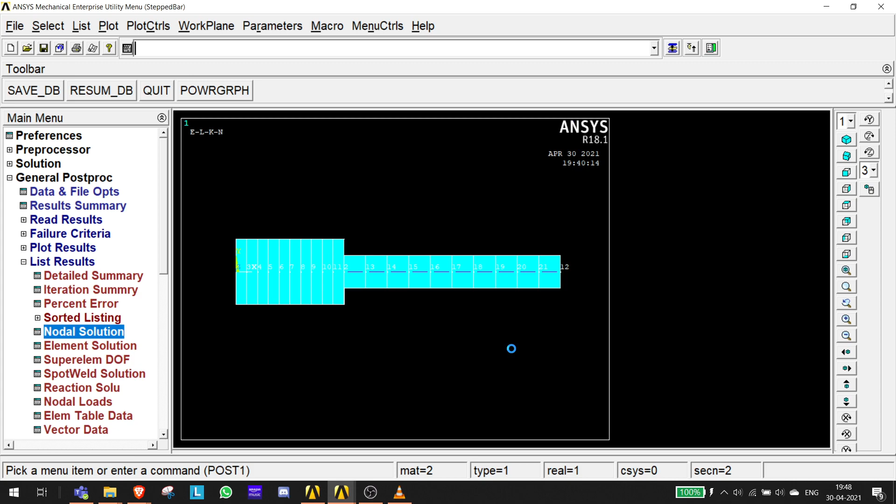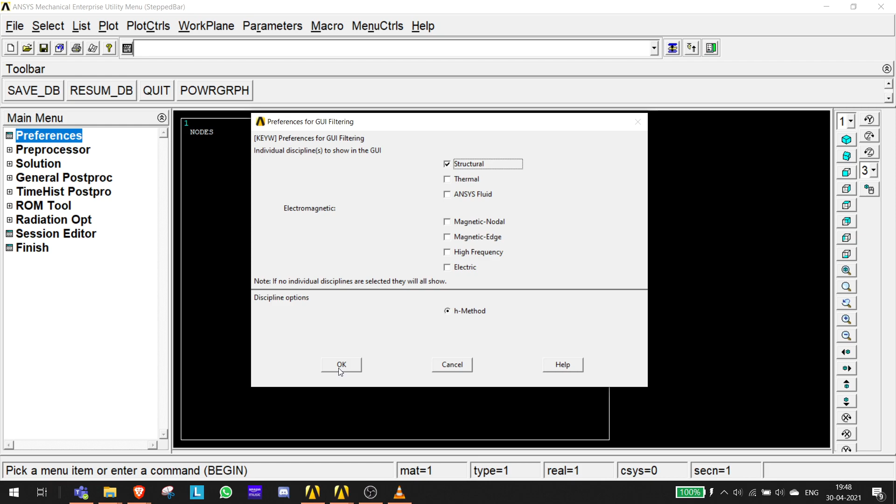And yeah, so this is a new file and now we have to analyze. This is our question, right? So अभी इसमें देखो लेफ्ट वाला जो एंड है दैट इज फिक्स्ड एंड इसका क्रॉस सेक्शन इज डाया 20 mm का सर्कल है, ठीक है। So I start, preferences will be structural because we are performing a structural analysis. Click OK, go to preprocessor, element type, add/delete, add.

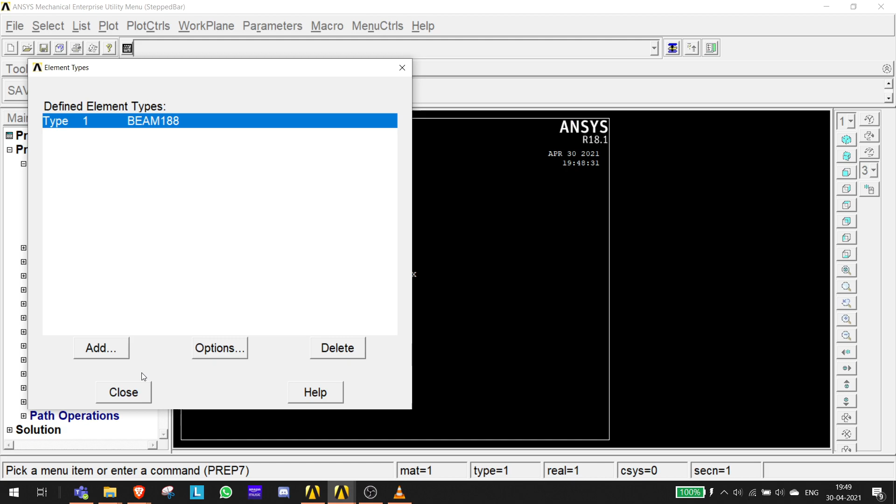Now this is again a beam element, जो last practice में किया था वैसे ही, this is again a beam element and it's two noded because then we apply elements and divide it into number of nodes. So इसलिए इसको two node ही रखते हैं हम लोग and click on OK. So see, only a single element is added and now I'll close this. Element is done. Now we have to give material properties, and so for that we go to material properties, material model, structural, linear, elastic, isotropic, right?

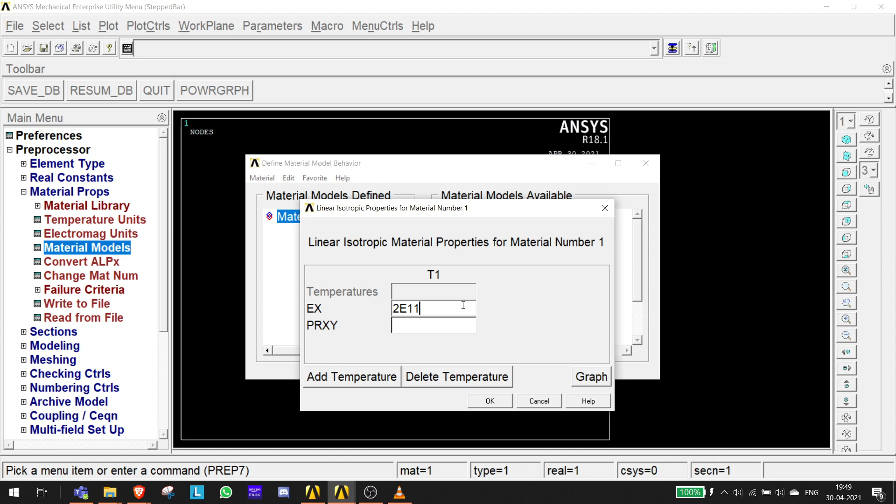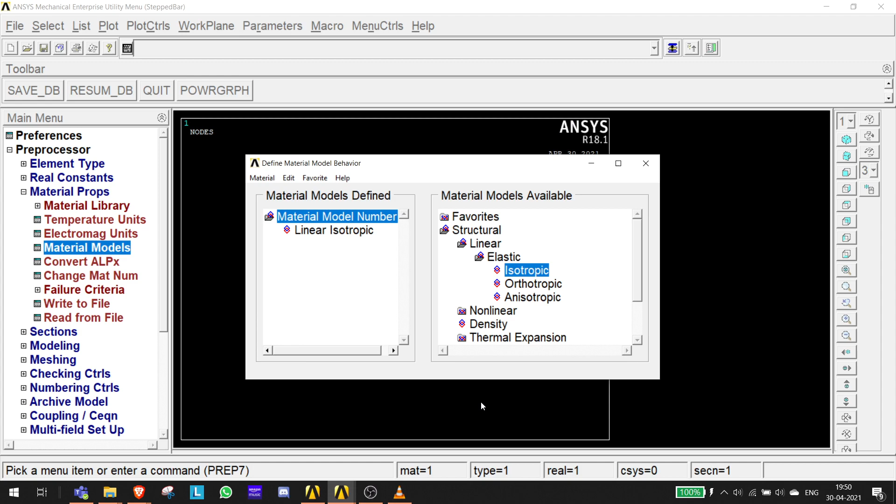Now what is EX? In the question it's 200 GPa and mu is 0.29. So as I told, ANSYS is dimensionless, so we have to give it as 2e11 because we have to decide the dimensions. So I am taking it as Newton per millimeter square. So converting 200 GPa to Newton per millimeter square, it gives out the value of 2e11. Okay, and the Poisson's ratio is 0.29. So I'll put it as 0.29. Now click on OK, and yeah, so the material is defined. Okay, so we have defined the materials now, right?

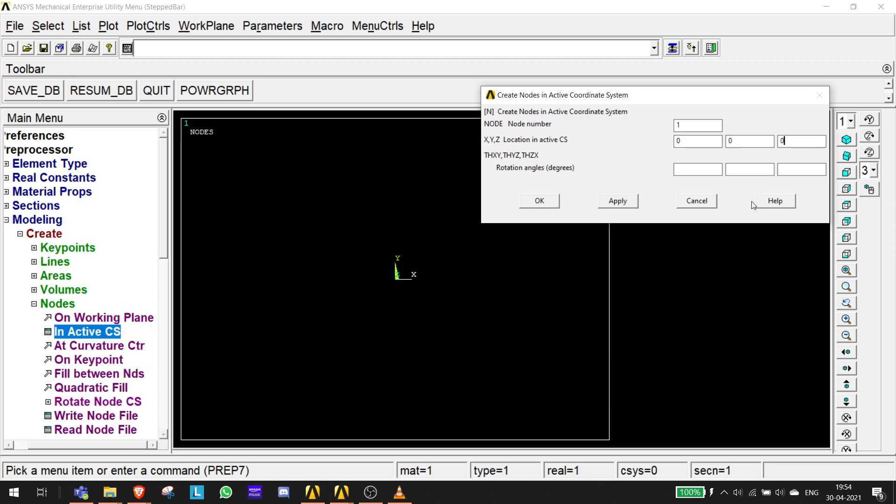It's 100 mm. So for 100 mm, go into modeling, you have to first create key points or you can even create nodes. So this time we'll be creating nodes in the active CS. So in active CS now it's asking for node number, right? So node number we can define as 1 and इसका location will be here, so it will be 0, 0, 0, right? ठीक है, हो गया. Click on OK and see, a white small dot has appeared and the node is created here.

Now in Active CS again, but we have to give node number as 2, and for node number 2 only the x direction

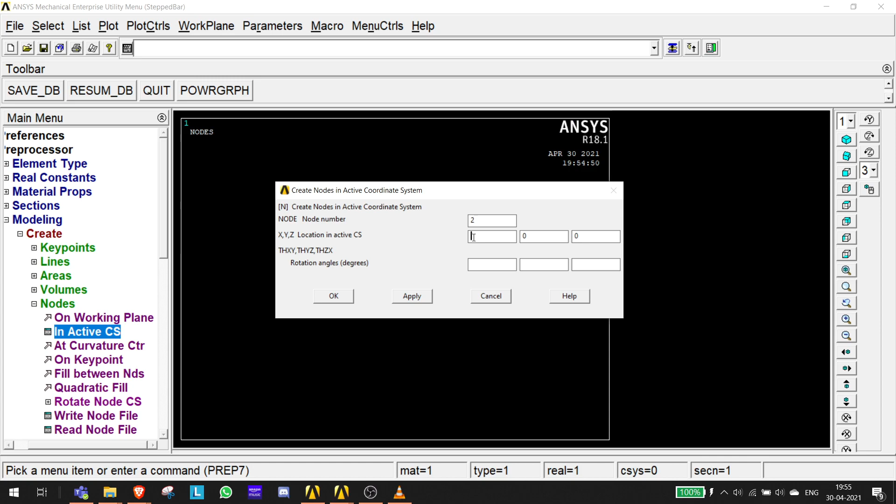So I do this as 100, and now I'll click on OK. So see, both the nodes are created.

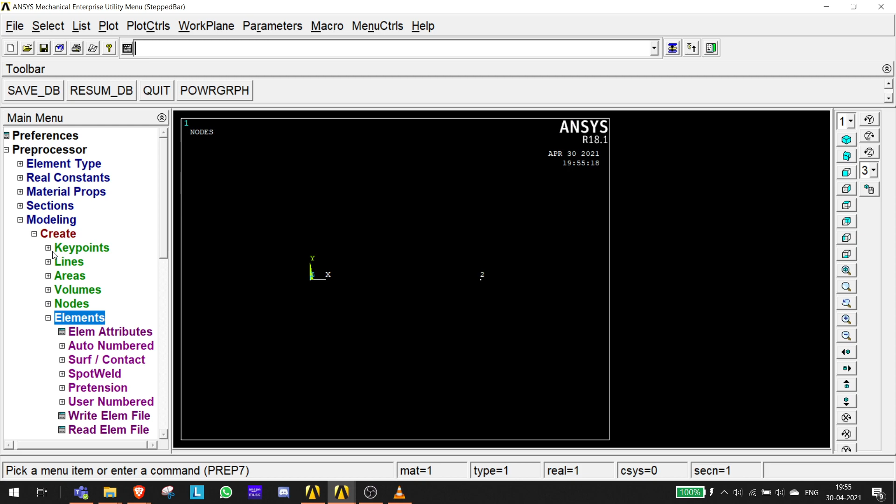Okay, just a second. So, fine. So here it's saying that these nodes which are created now cannot be used for lines. So for lines you have to always use key points. Okay, so what we will do is we will delete these nodes and we will do it with lines only. I'm sorry, but I'll select both of these and click on apply. So now these two are deleted.

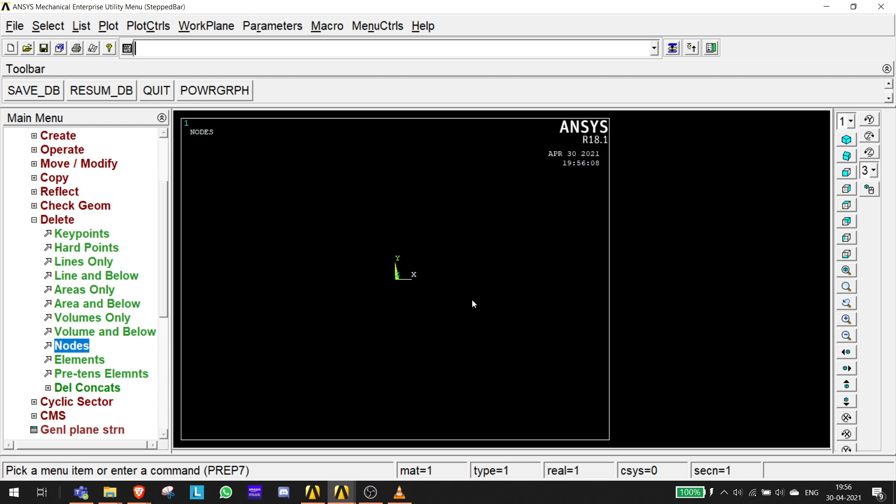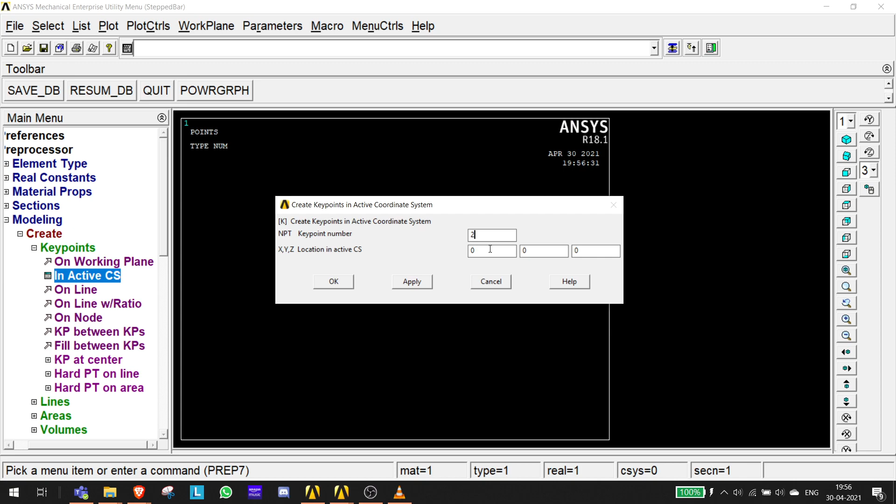So we'll go to preprocessor again, go to modeling, now create key points. As I said, in the last video we created key points. So in key points, go in Active CS and again we'll give key point number as 1 and it will be 0, 0, 0. Apply, and the second key point will be at 100. So 100 and OK. So see, both the key points are there now, and now we can create a line.

Okay. From nodes also we can create lines, but I'll tell you in the next video how to do that, because currently I don't remember it.

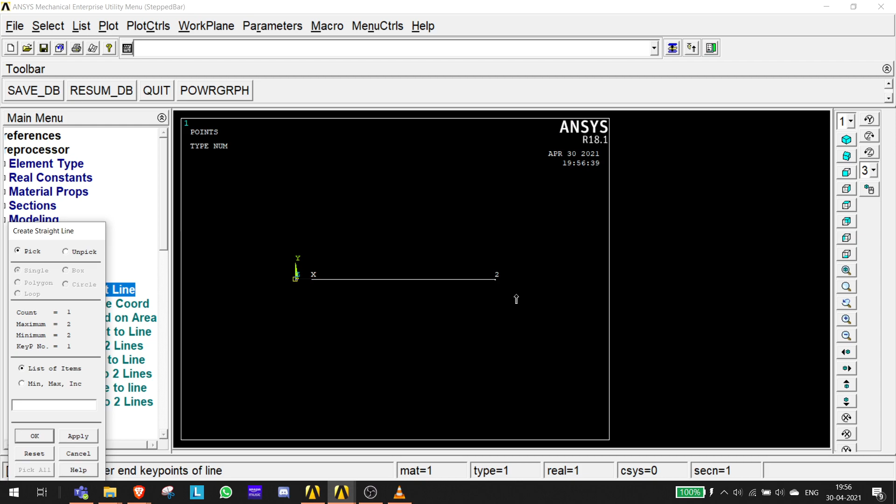So go into lines, go to straight line and pick these 2 points. See, your line is created. Click on apply. Yeah. So your line is done. Now what you have to do, the next step written here is meshing. So in meshing, go to mesh tool.

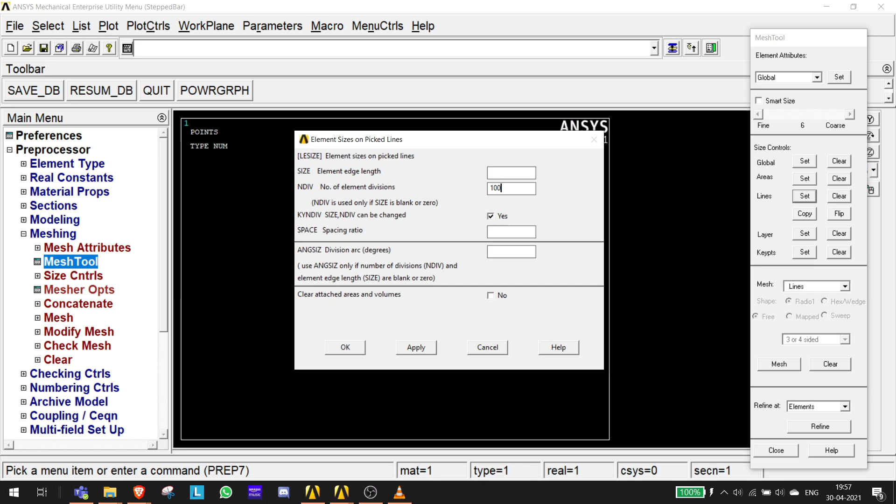So this time, lines, and click this line, click apply, and now I'll be dividing it into 100 elements. Okay, I'll click on apply. So see, now this, oh, it disappeared. So what to do? Go to plot, multiplots. See, now this is divided into 100 elements. Okay, so click OK. Now you cannot see the mesh tool tab. Go Alt+Tab and see, this comes, and now you have to mesh this line.

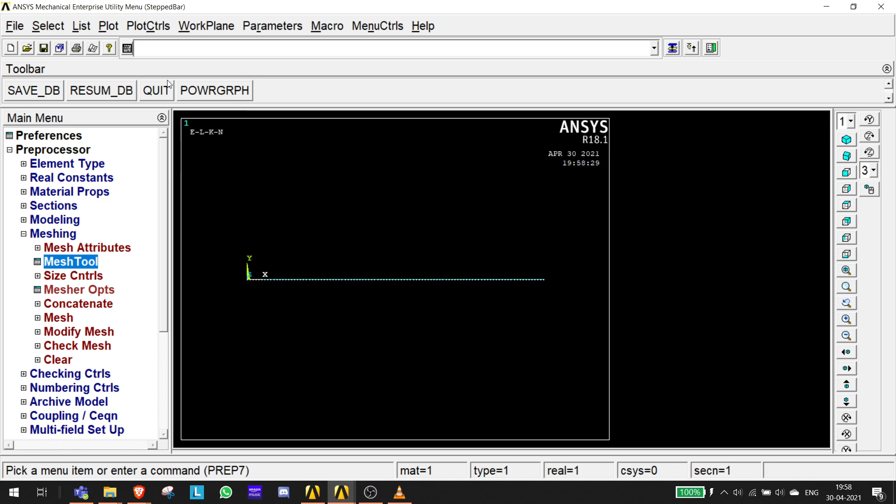So click on mesh and click on this. So this whole thing, and click on apply. So now this line is meshed. Click on OK, go to plot and click multiplot. So you can see these white dots appear showing that this line is meshed. Since this line is meshed, now you will be able to see the cross section. So go to style, size and shape, check if the cross section has appeared.

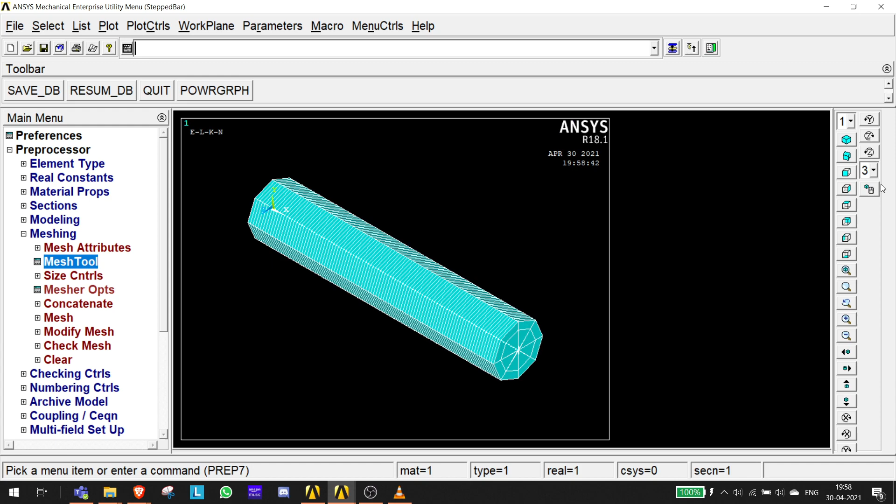Click on OK. So yeah, I'll just make it a nicer view. See, it's near circle because APDL works kind of that way. The cross section looks like this, but it is circular. Don't worry about that. So now I'll do the front view again and I'll turn this element off. Go to style, turn this off. Okay, so now the last step is defining the loads.

Define loads. Go to define loads and go to apply. Now where are you going to apply and what are you going to apply? These were two concerns. Okay, so firstly we will be applying structural load, structural displacement. Where? Displacement on key points. And which key point? The leftmost. So see, there is a trick.

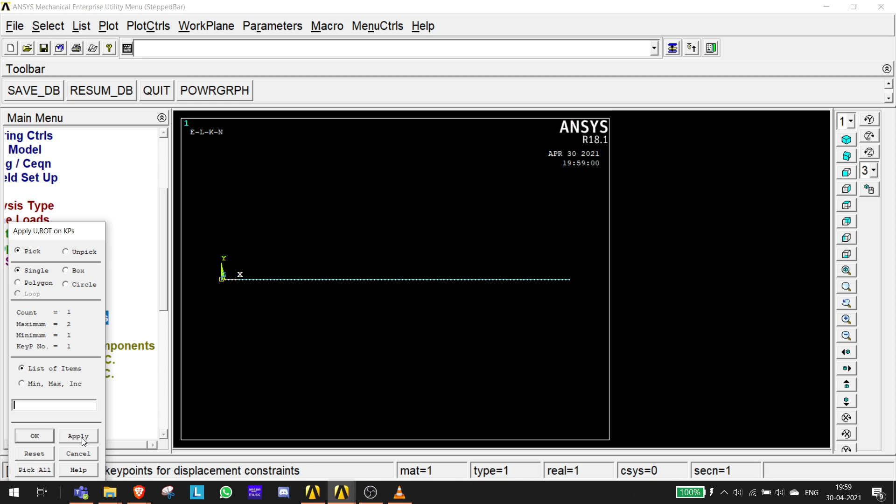If you are not sure whether the first key point or the second will be selected, go to the leftmost part and click. So it will always select the first key point. Okay, if it's there for first and last, you can apply this trick. Okay, now click on apply, and all degrees of freedom will be set to 0, and click apply.

Okay, so this side is completely constrained. Click on OK. Now you have to apply force. So go on force, click on key points. Now which key point? The last one. So click the right side, most rightward. So it will click the most rightward key points.

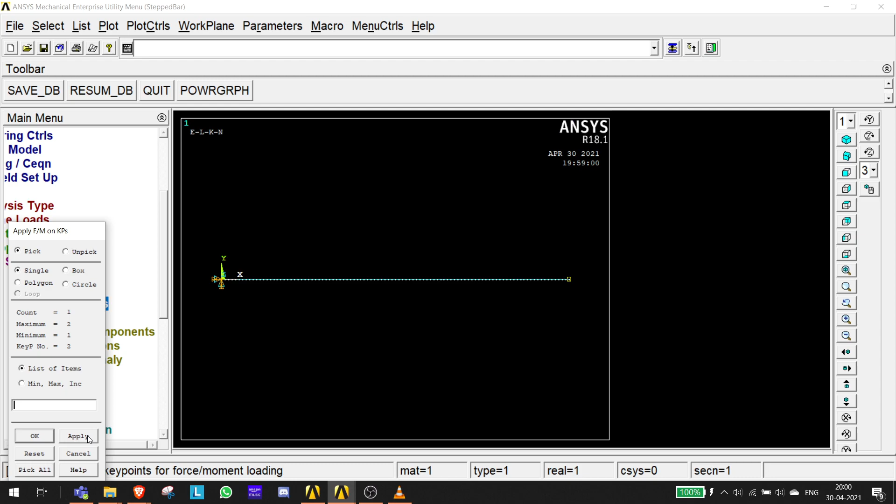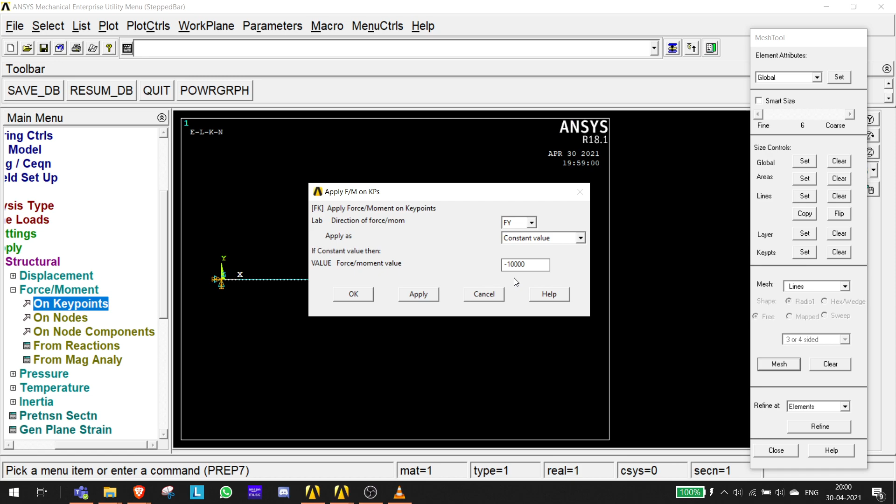Okay, so now click on apply, and now in this case it's not in X direction as the previous one, it's in Y direction. See, it's a vertical load. So for vertical load it will be Fy, and it will be not positive but negative 10,000. Now why 10,000? Because ANSYS is dimensionless, as you know, and you have to keep it like that. Okay, so now click on OK. So you can see the load has been applied.

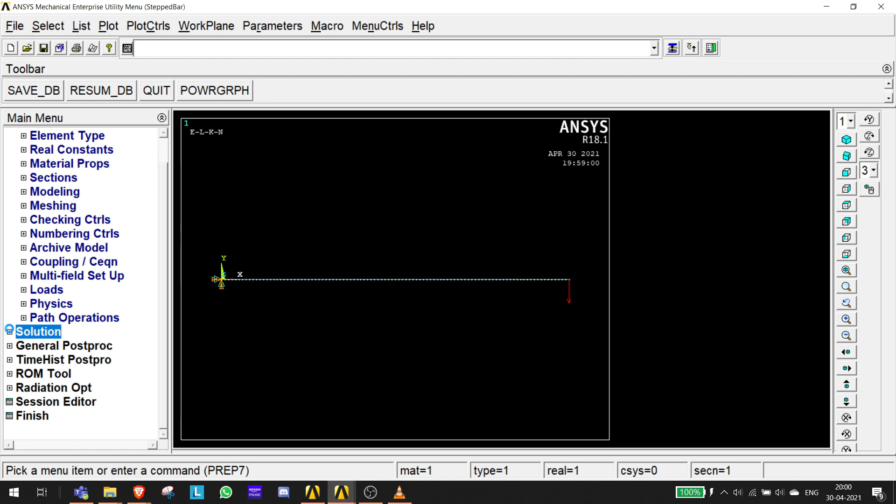Now this will be a screenshot again for the DJ Sanghvi students' practical exam. And now close the structural define loads. And now what you have to do is the solution. Okay, solution, go to solve current LS and click on OK. Yeah, so the solution is done. Great job. Now you have to check whether the solution is generated.

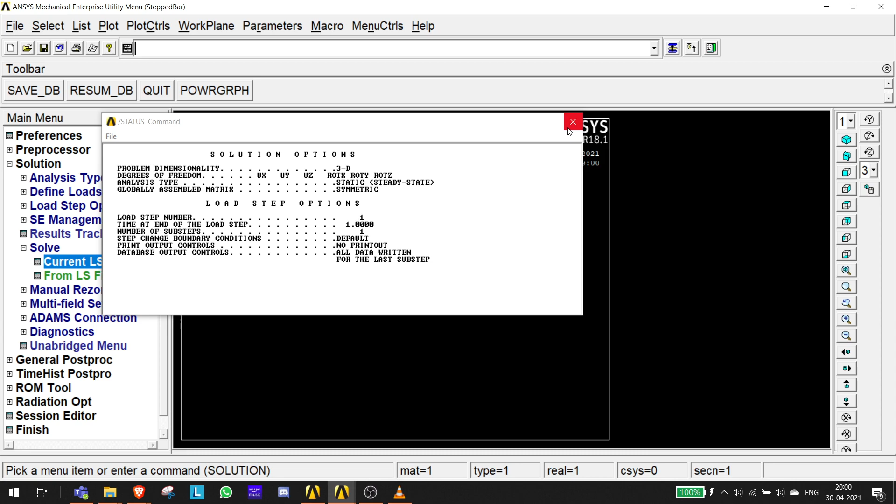So go to plot controls. Firstly turn on the element display and click on OK. And click the ISO view for better judgment. And yeah, so this is now generated. Now go to general post processing for the results.

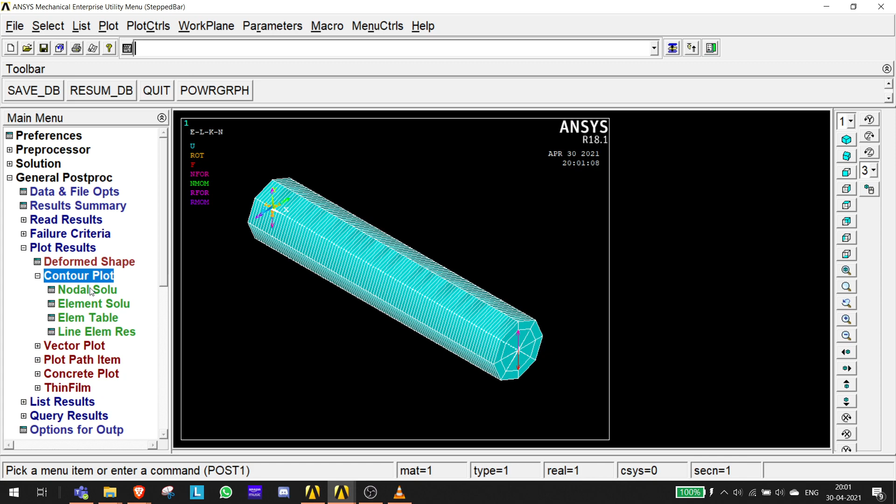Go to plot results, contour plot, nodal solution for displacement, and this time we'll go for Y component because the element has displaced in Y direction, right? So we'll go for Y component of displacement and click on OK. So you can see this element has gone down the most, and hence it's most blue, and this element hasn't moved, so it has 0 displacement.

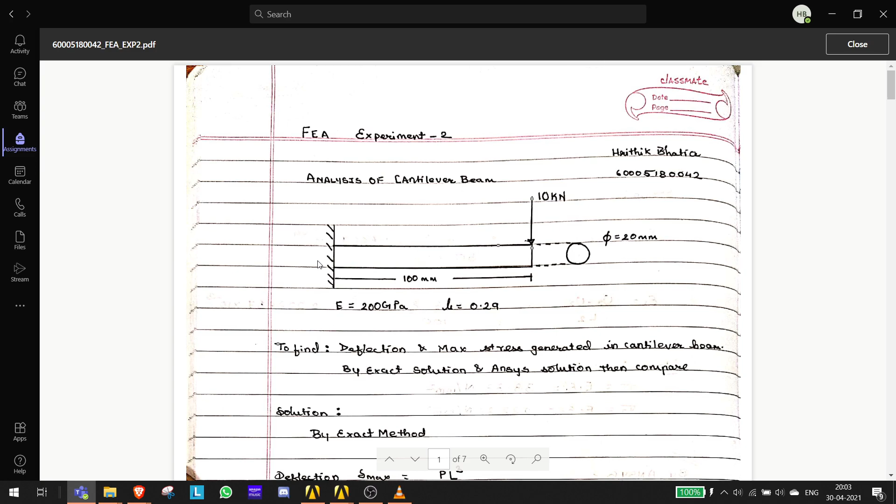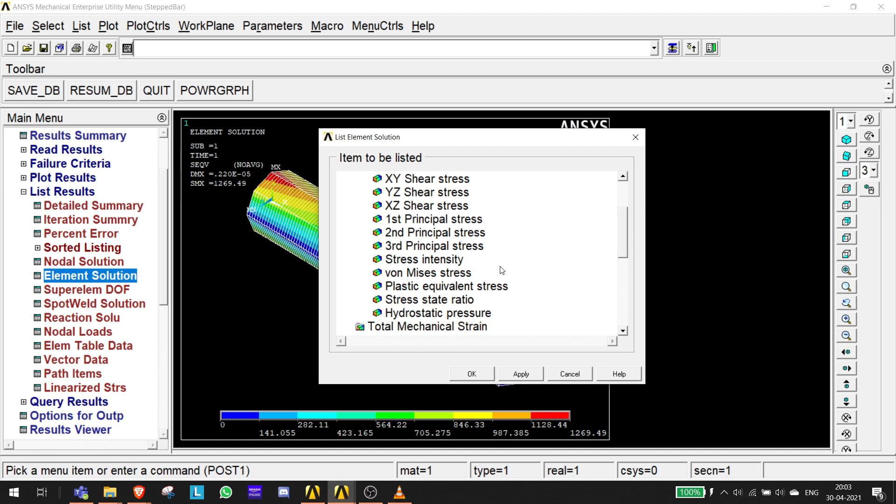So if you want to check the value, go to list results, nodal solution or elemental solution, and stress, and click on von Mises stress and click on OK. So see, now you get all these nodes, so you have to check for which node. So go to plot controls, numbering, and node number should be turned on, and click on OK. Now as you can see, there is no difference here.

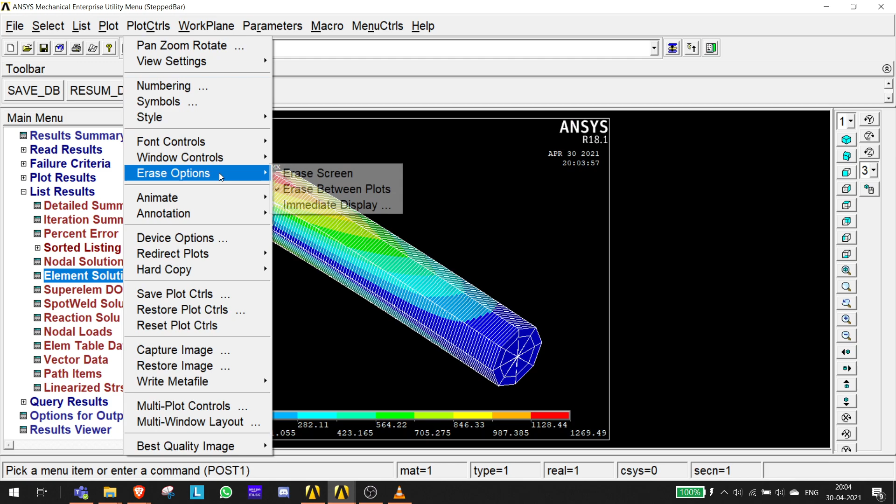So firstly I'll just turn off the elements because it's creating a bit of noise in the screen. I will turn display of element off and click on OK. So now you can see, and I'll do the front view. So as we have 100 elements now, I have to zoom to this region, right? So you can select this option, zoom model, and select this region.

Okay, so now this is node number 1. So for node number 1, what was the list result? Go to von Mises stress, click on OK. Yeah, see, this is for element number 3, so you have to find where element number 1 is. So element number 1 will be mostly at the end, and this is because it has the highest stress, right? So once you find it, you can verify the values, or else it will be a bit of a task finding it.

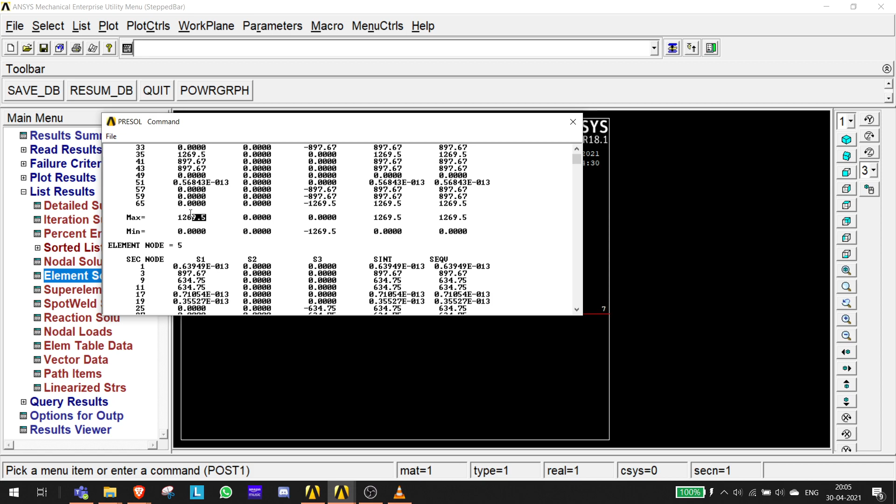Just give me a minute, I'll just see if I can find it. Yeah, see here it is written as element number 1 and element number 3. So what it denotes is the stress at both of these is maximum, and that is 1269. Got it? So 1269 is our maximum stress, and minimum stress will be generated at the last end.

So again I'll go to zoom model, and I'll zoom out a bit, but I have to zoom into this region. I'll click on this. So this is node number 4. So where will node number 4 be? It will be at the end, because in the model also it is at the end, right? So see, it's node number 4, and node number 4 has max stress of 634.75. So this is the calculation for practical number 2.